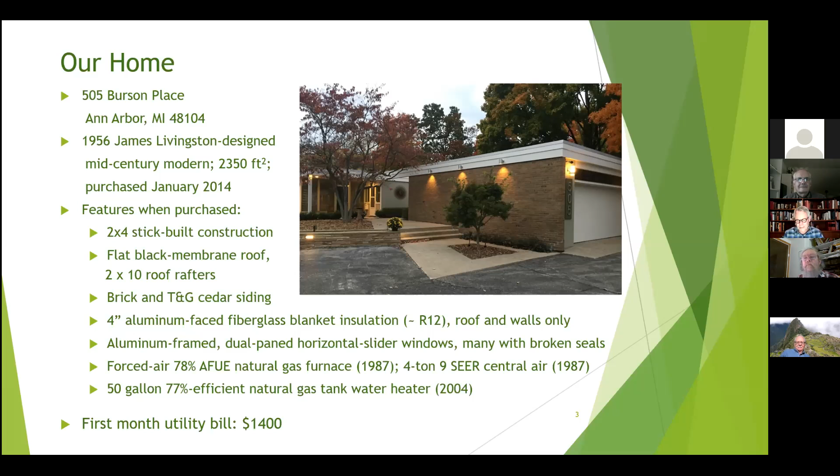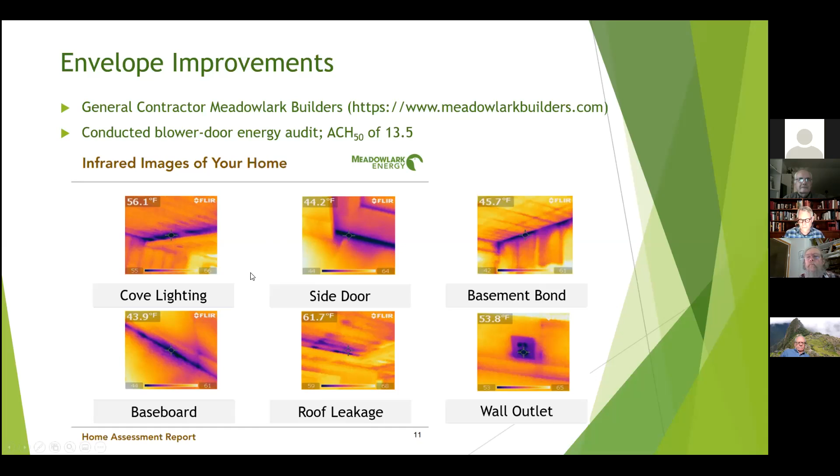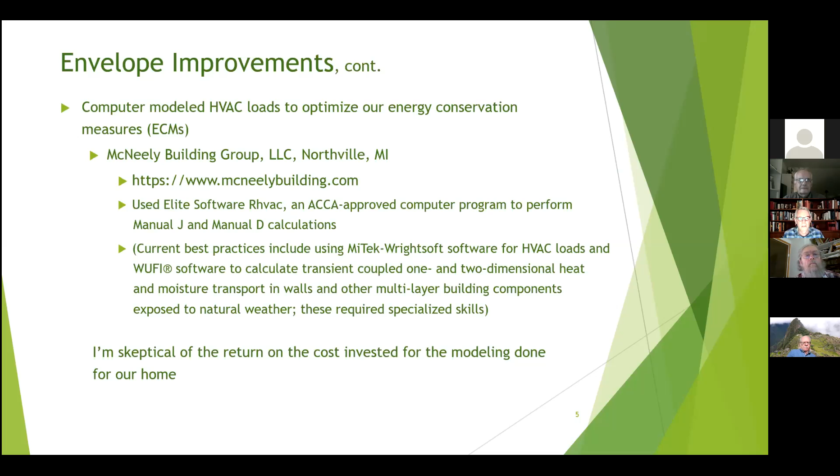The first thing we did with that information was pay Meadowlark to subcontract a computer modeling of the HVAC loads. I have information here on that and also on current best practices. My belief is it was probably wasted money, because I think we ended up doing probably what we would have done anyhow, but going in I thought it might be worthwhile. It was recommended to us, so we went ahead and did it, and I'll show you what we then proceeded to do.

The first thing is we installed open cell polyurethane spray foam insulation - it's got an R value of about 4 per inch. We took down all the ceilings in the house. We didn't want to remove the membrane roof, which would have been very expensive, although this wasn't exactly cheap either. So we spray foamed the entire roof - these are the 2x10 roof rafters we have here.

We also, in the basement and crawl space, took out furring strips and walls. Basically we had about a 1/2 inch air gap between the block walls, and we took those out and put in 2x4s, offset so we could get a thermal break. We did that in all of the crawl space, as you can see on the right, and in about 80% of the basement area. As you can see on the bottom left, these are typical leak areas - if you think about the whole perimeter of a house and all the points where you're breaking the joists, you've got a lot of leakage around those places. Our basement and crawl space were completely uninsulated when we bought the house.

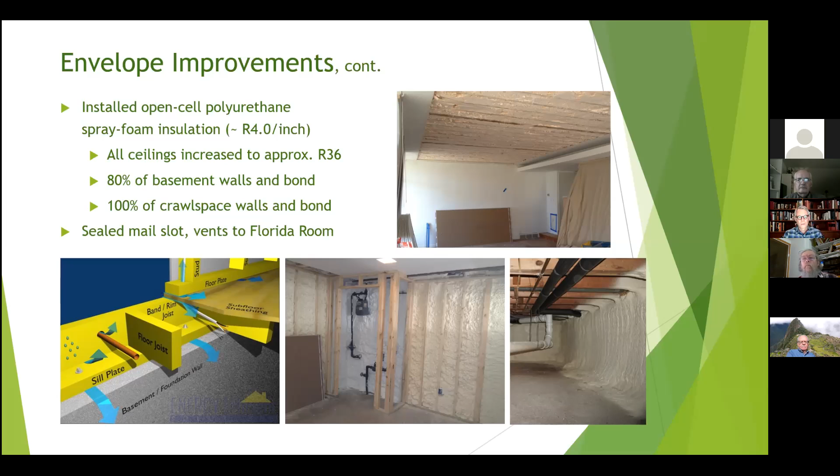Then we did some other small things. We had a mail slot in the door that leaked like crazy, so we blocked that. We also had vents to a Florida room, or 3-season room, with a louvered vent, and we knew we had a lot of losses through that as well, so we plugged those up.

The other thing we did is replace all of the windows. We knew we'd do this when we bought the house because they were a disaster—aluminum framed, and aluminum is obviously a good conductor, so they weren't insulated. These Alpen windows, manufactured in Colorado, have fiberglass frames, they're insulated, with 2 panes of glass and a coated film suspended in the middle, filled with an inert gas. For a fixed pane, and most of our sliders, R value is in the range of 6 to 6.7, which is really good for a window, especially 5 years ago.

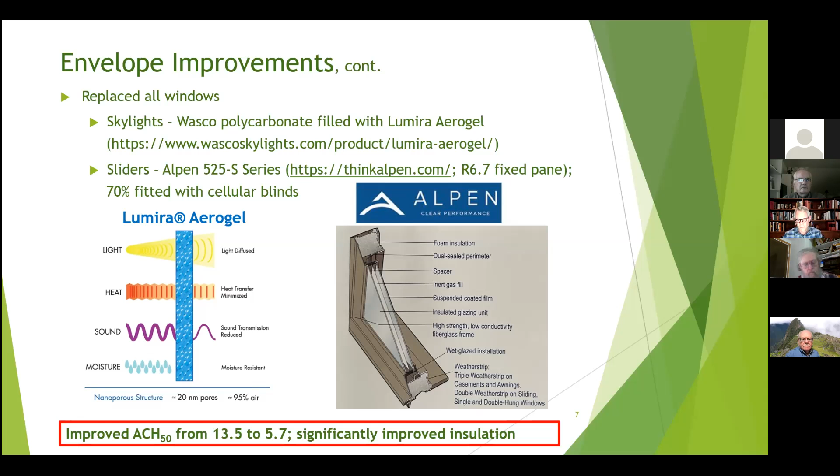The next thing we did is look at our mechanicals—HVAC, appliances, and lighting. I showed earlier that we had a very old, inefficient furnace. New furnaces are up to almost 99% efficient, although that's not really a good way of measuring gas furnaces, because you're burning gas at a couple thousand degrees Fahrenheit just to raise the temperature of your house to maybe 70-some degrees. It's not a smart way of using fuel to heat a house, because a lot of the potential is essentially lost.

So we went to geothermal. I worked for Bosch, and Bosch makes geothermal units, so of course I have a Bosch geothermal unit in my house.

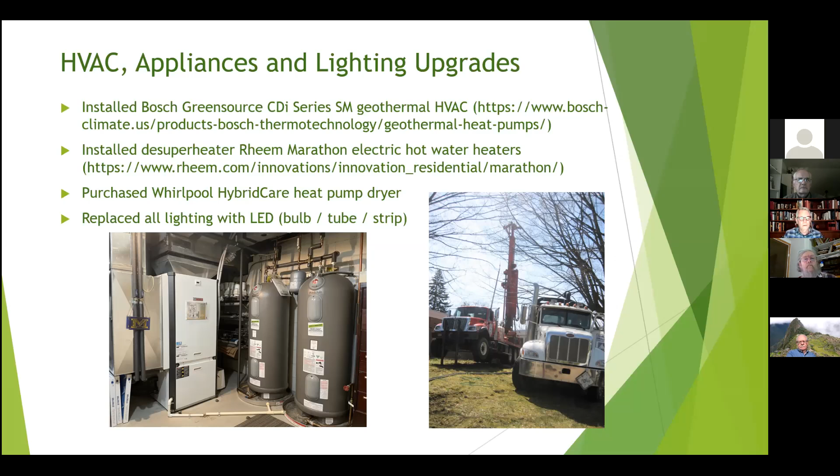The other things we did is replace our appliances—the ones that came with the house were really old. We have a front load washer, and also a heat pump dryer that we use, though I'll tell you later we don't actually use it very much. We also replaced all of our lighting with LEDs. So all these things are significant energy improvement or efficiency measures.

So the next strategy is to go to renewable energy. I'll show you another picture of a house later on. Right now, I don't have solar on the roof. With a flat roof, I was a little concerned for two reasons.

First, leaks on flat roofs can start in one place but be visible somewhere else horizontally, and I didn't want to be hunting for potential leaks underneath a whole bunch of solar panels. The other thing is the roof had about another 15 years of life on it, and I didn't want to put solar panels up and then have to disassemble everything to replace the roof and put them back on.

So instead I procure all of my power through Arcadia—they used to be called Arcadia Power, now it's just Arcadia. By the way, they're a benefits corporation, and I can talk a bit more about what that means. Basically it's a company with slightly different governance, where they promise additional transparency, and serve not just profits, but people and the planet.

I get 100% wind subscription. Basically, what I'm doing is purchasing renewable energy certificates, and those are retired. Arcadia, in a sense, is set up like a bank. So just like if I were to set my bank up to pay my DTE bill every month, Arcadia pays the DTE bill, and I pay Arcadia a premium of about 1.5% on the electric side. With all the measures we've taken, we average $205 a month, and that includes charging our electric vehicle, which is our primary vehicle.

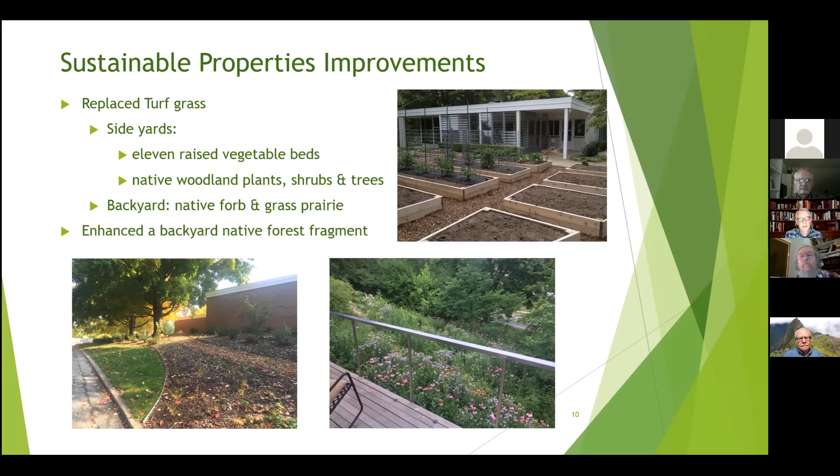We just did that actually this summer. And in the backyard, that hillside used to be a miserable hillside of weeds and grass, and it was no fun to mow. So I put in a native prairie there with native forbs and grasses. Then just to the right of that little native prairie, we have a native forest fragment, and we upgraded or enhanced it. You can see some of the other property improvements we made in that area.

We removed a ton of little invasive trees and saplings, and we planted a lot of next generation native trees. We tried to mix in a whole bunch of different species, because every species supports different other kinds of species, mammals, etc. So we wanted to be sustainable that way.

We put in a bunch of birdhouses, feeders, and a bath, and put in a pollinator hotel. We did a compost bin, and we also have 2 retractable clotheslines, which we use year round. That's my good German wife, being a good frugal German, growing up in the frugal part of Germany. Well, all Germans are pretty frugal, but so we did that as well.

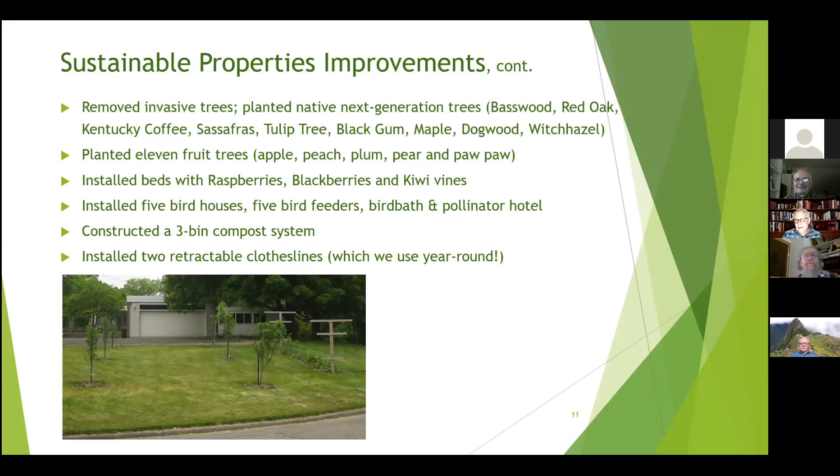From a transportation point of view, we're very fortunate that we live within walking distance of downtown, so a lot of times we'll walk to campus for different kinds of events there. Also, some of my meetings, when they were in person, used to be on campus. We can get downtown in 30 minutes, so in the summertime or fall and spring, we almost always walk downtown, going out for dinner or just going to the library or something like that. I use my bike a lot - I'll even bike to Energy Commission meetings in the middle of January if the roads are dry.

You can see we have 2 vehicles. We have a 2012 Volt, and we have a charger in our garage. Then our Outback is an internal combustion engine, but it's somewhat better in that it's got some lower emissions. There's a class called partial zero emissions vehicle, and we have one of those.

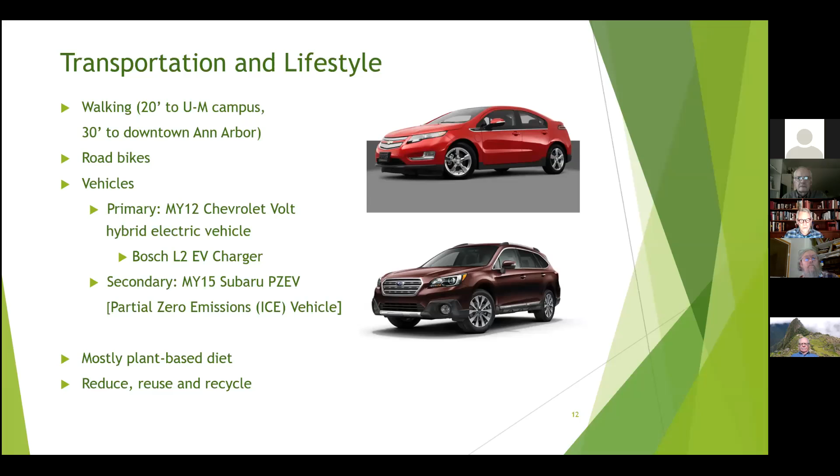And then finally, from a lifestyle perspective, we have moved mostly to a plant-based diet, not entirely, but mostly. And then we do our best to reduce, reuse, and recycle.

So what does that mean in terms of next steps? Well, we are planning on becoming a 1-vehicle family. We were going to sell our Subaru to our son, but it turned out to be more of a car than what he wanted.

So probably in the early New Year we're going to sell that. I need to install a smart thermostat. We still have a natural gas cooktop, and our plans are to get rid of that.

We'll replace it with an induction cooktop. That means the only things preventing us from really being zero emissions are we still have a gas grill and a gas fireplace, which we use maybe 15 to 20 times a winter. I also want to improve our leakage.

There's a couple of possible culprits here. Our stove hood is the original one, and I wouldn't be surprised if there's a lot of leakage there and chimney effect.

The other thing I want to do - you can see in the lower right, that's an aerial view of our house, and it's a perfect location. As I said before, it's a flat roof, and the roof still has some age on it. So I may do one or the other: potentially augment my wind power by investing in community solar, either through Arcadia, which has a program for that, or locally if it's enabled through legislation in Michigan. The other possibility is re-roofing at some point.

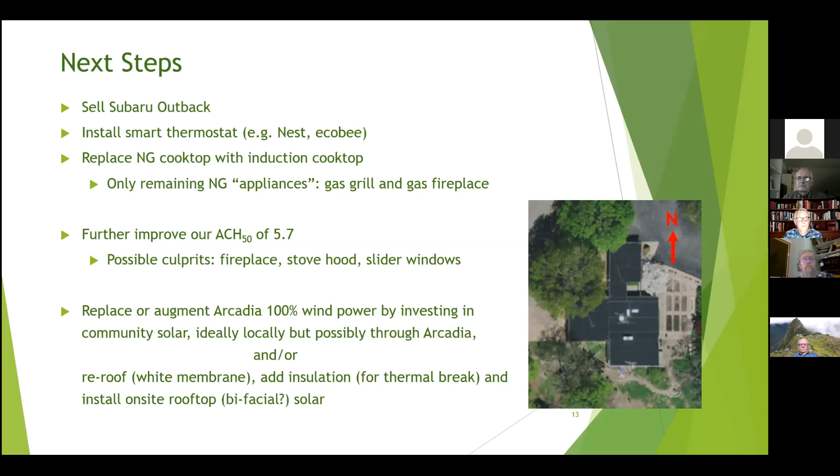And what I want to talk about now is our investment in Ozone House.

This was with my wife's concurrence. We created, with some other people, Ozone House Solar, a limited liability corporation, and we used a set of templates from the Michigan Interfaith Power and Light organization.

Called Solar Faithful. Murray Rosenthal presented a detailed version of this back in late May, posted in early June to the GLREA YouTube site. He went through their 18-step process in detail. I'm not going to go to that level of depth, but I think it's still interesting to tell you what we did, maybe from a slightly different angle than Murray did.

The nice thing about this model is that it was developed because nonprofit entities, since they don't pay taxes, aren't eligible for the solar tax credit, and they also can't take depreciation like a for-profit entity can. This lack of financial incentive means a lot of nonprofits forego installing solar because it's just not as attractive as it is for individuals or for-profit companies, even though there's obviously a lot of interest from stakeholders.

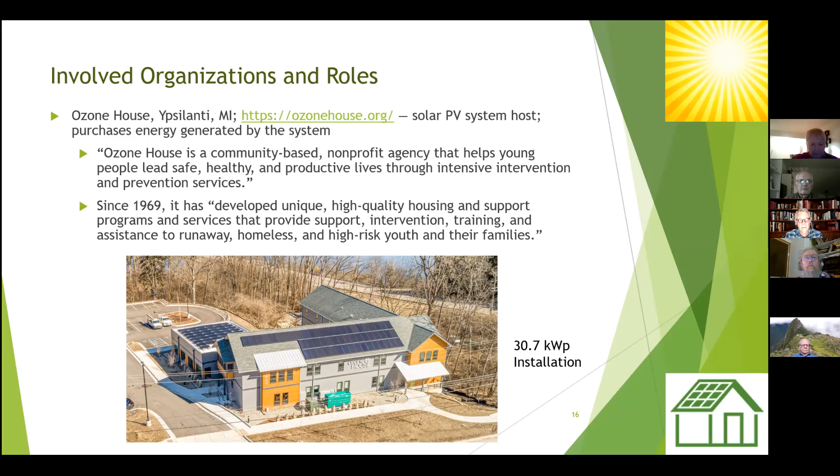This is a brand new facility built just outside of Ypsilanti. That's the Huron River in the background. You can see in the picture we put in almost a 31 kilowatt peak installation, both on the flat roof in the back and on the front roof.

There are 4 of us that got together to do this. Jan Culbertson was sort of the lead on this - she had a relationship and did a lot of pro bono work for Ozone House. Her mother, myself, and another fellow from Ann Arbor all got together, and we formed this limited liability corporation to put solar on the roof.

We contracted with Distributed Power. Brandon Knight - I think Distributed Power is a GLREA member, and I believe Brandon has also done a My Solar Hour. So Brandon did the work for us on the rooftop.

We have solar on the rooftop, and that is going through a smart meter. When the array is producing, during the daytime, it's supplying power from the meter into Ozone House, providing on average about 40% over a year of the estimated needs of Ozone House. I don't know what that is right now since it's a brand new facility, but that's the way it was laid out.